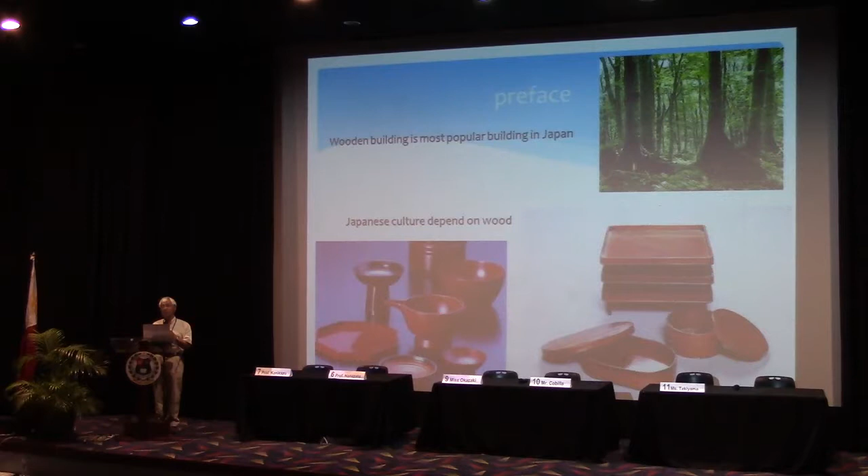Mainly four topics. At first, I introduce wooden buildings in Japan. Second, weak points of wooden buildings. Third, restoration work in Japan. And finally, cooperation between the Philippines and Japan. Of course, generally said, Japanese culture depends on wood as material. There are many buildings in wood, not only buildings, but also many handicrafts made of wood. And Japanese custom or ideas depend on a long time of life in wooden structures, wooden culture.

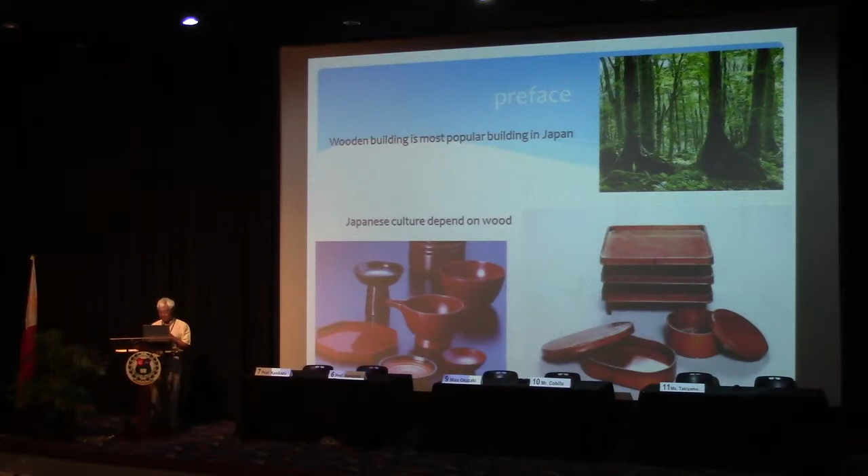I introduce some Japanese traditional buildings because before I introduce restoration work, I am afraid many persons did not see Japanese buildings. Some religious buildings. At first, I have to say, my presentation is not finished because I did not have enough time to prepare this presentation. And second, presentation time is too short. But I hope participants can understand the outline of restoration work of wooden buildings in Japan.

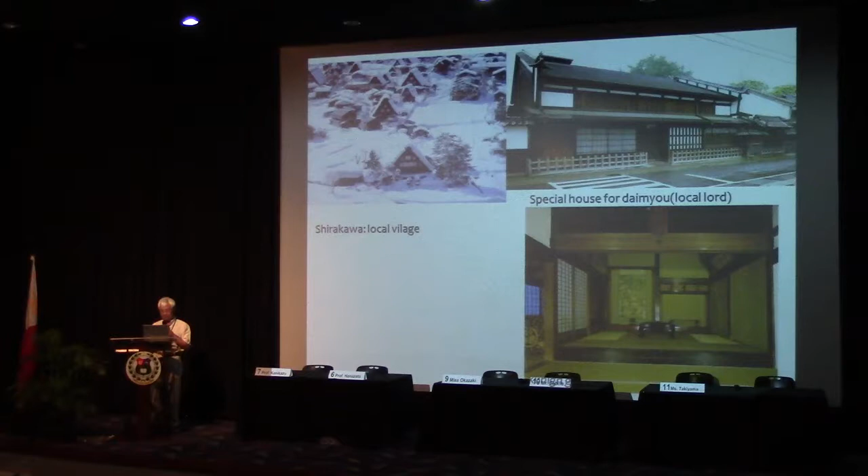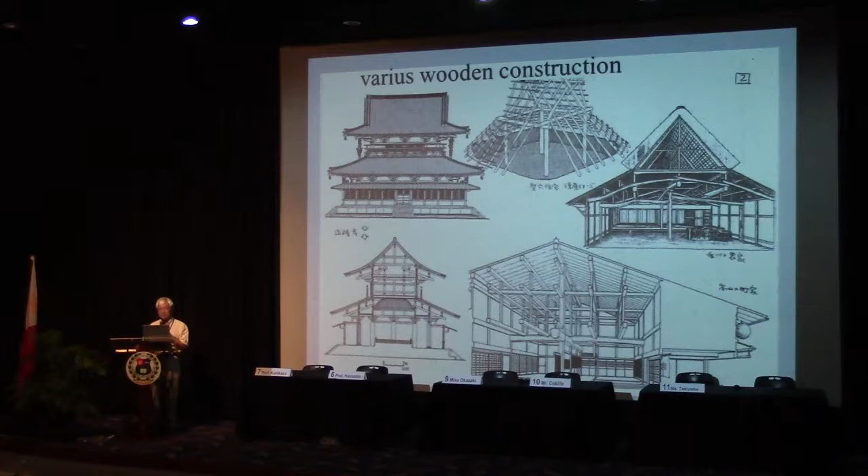This is also a Buddhist monastery, pagoda, some also religious buildings, shrine, Shinto shrine building, castle and tea house, some domestic buildings in Japan. When we talk about wooden buildings, it's not the same construction. We have various wooden constructions like this.

And wooden construction is very simple; it means various parts combined one by one. It is the basic wooden construction. So it means it is easy. Of course, a building is built from the bottom and then one by one the upper parts. It means we know the method of building. We take off the upper parts one by one. The picture is a combination of materials in wooden construction.

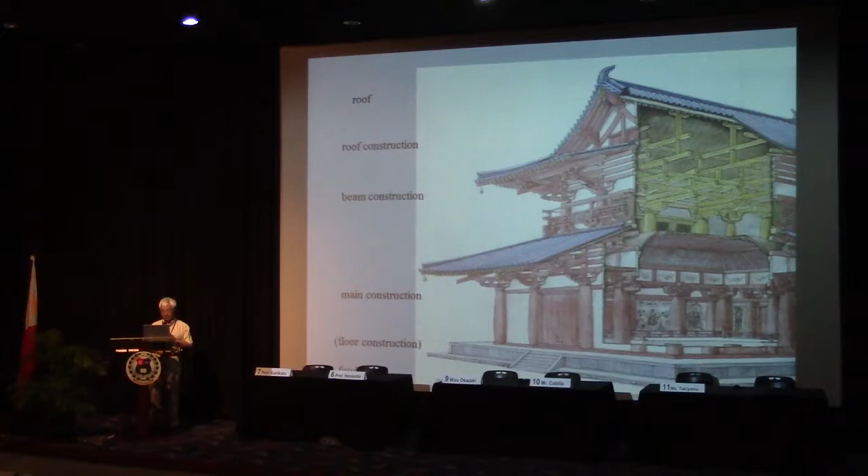And when we talk about Japanese cultural buildings, from the bottom we separate 6 parts: foundation and floor construction, main construction, beam construction, roof construction, and roof. But I say again, the wooden construction is combined by many parts like this.

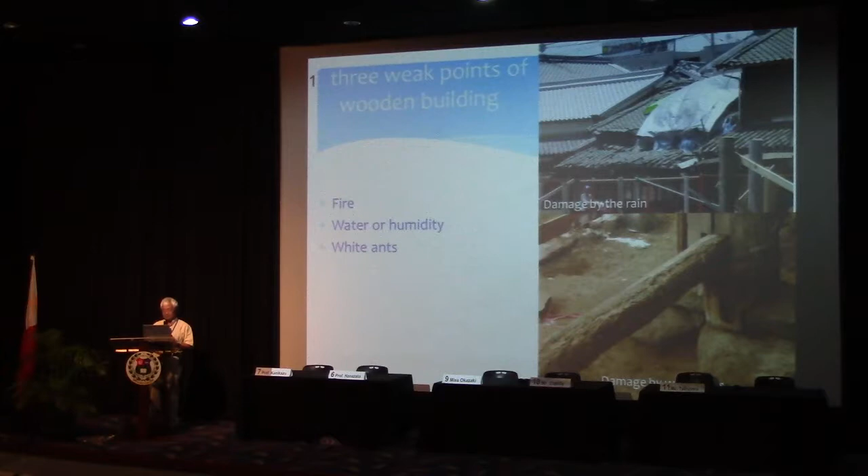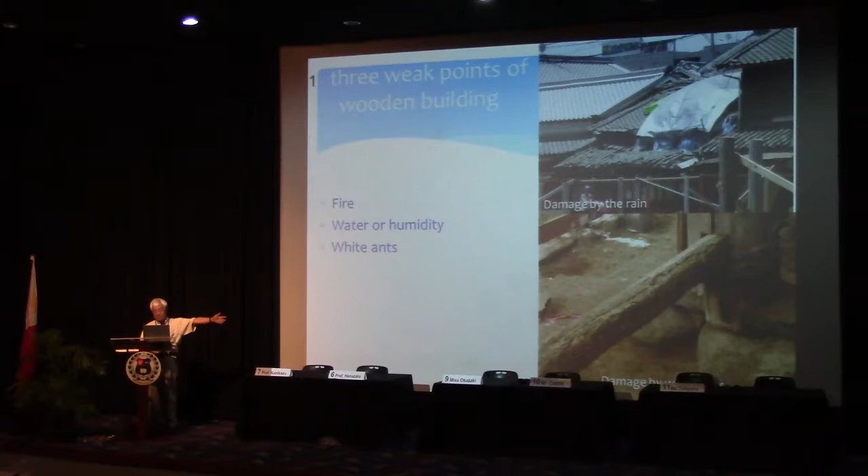Anyway, wooden construction has mainly 3 weak points, I think. First, fire, and water or humidity, and third is white ants and termites. The upper picture shows damage from rain, and the lower picture damage by white ants. And also fire, caused by many kinds of reasons. Sometimes battle or earthquake.

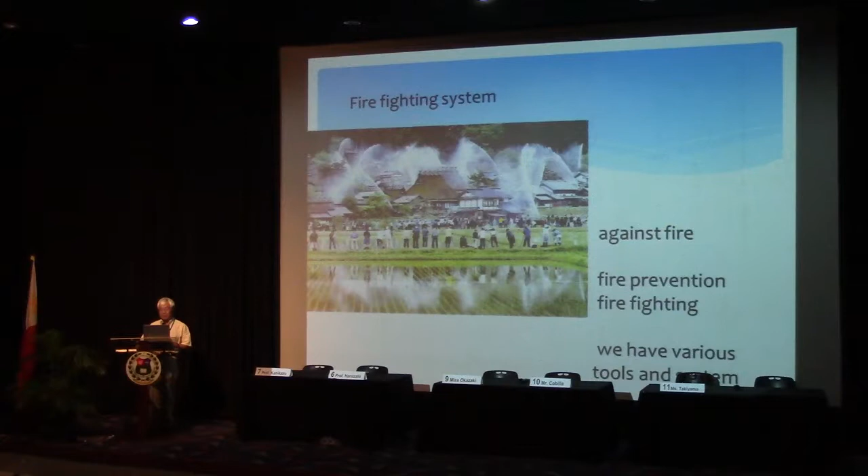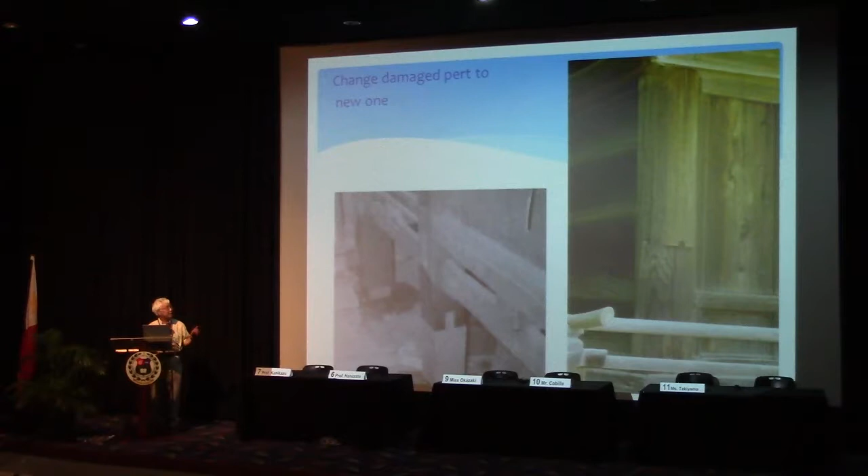And against fire, we have many methods: fire prevention or firefighting. And we need fire prevention and firefighting against fire to continue the building. And when we restore the wooden building, we have to change the damaged part to a new one. Like that, the lower part of the pillar is changed. Also, this is the bottom of a pillar that was changed.

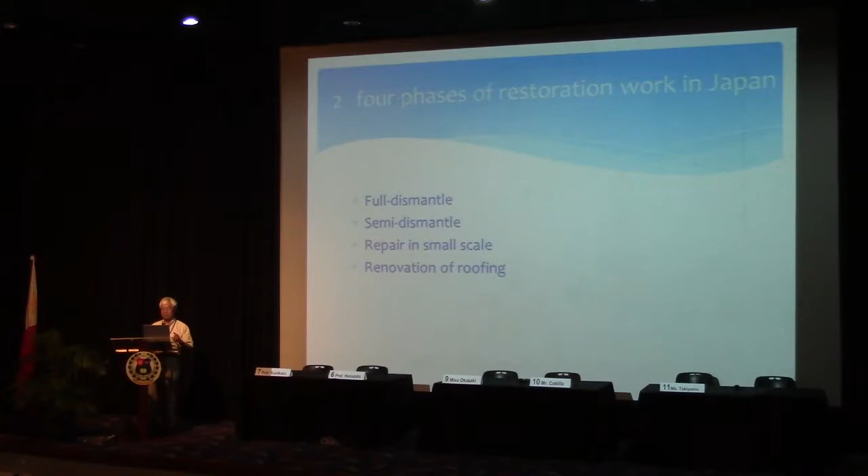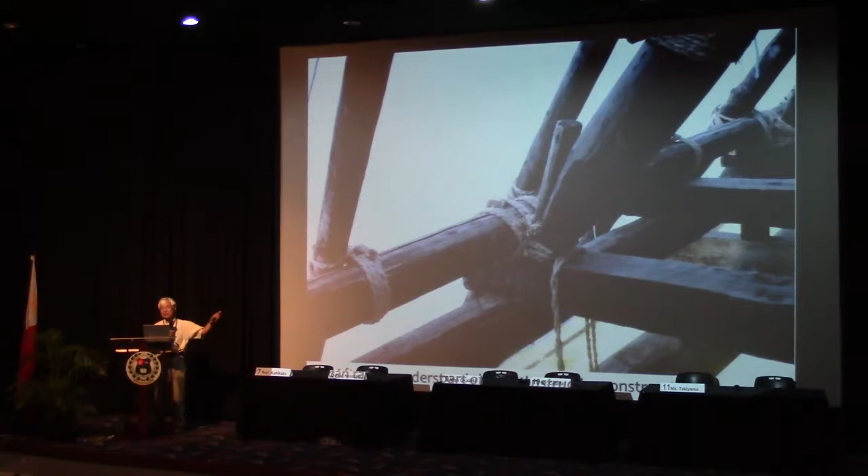And in Japan, restoration work has 4 phases or 4 categories: full dismantle, second is semi-dismantle, third is repair in small scale, fourth is renovation of roofing. Dismantle work means it is possible to take off parts one by one from top to bottom. If we know it correctly, it is no problem to take them off. You can understand if you know how to make this construction, it is easy. At first, to cut the rope, and second, some rafters, beams.

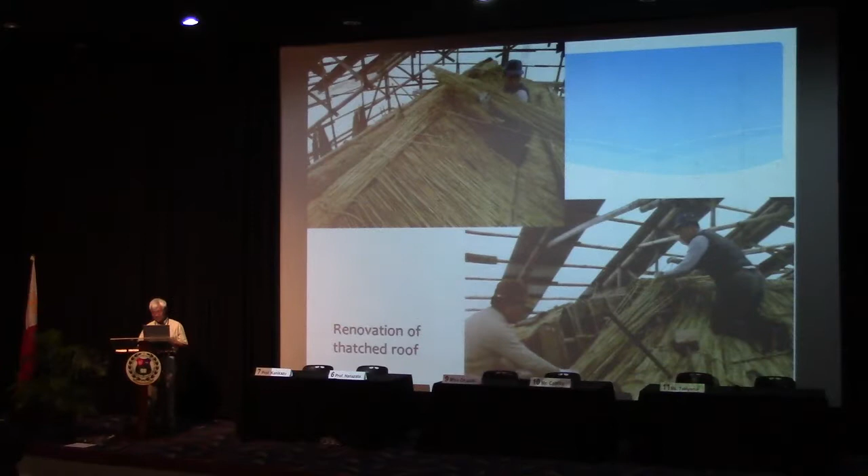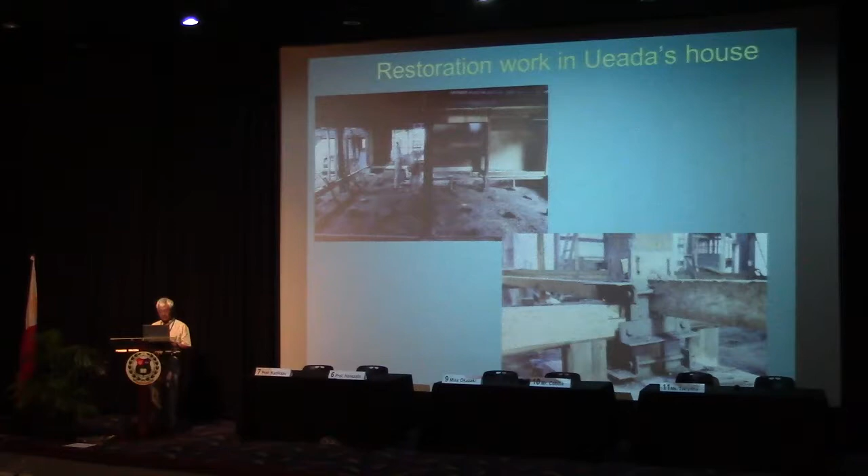This is also after restoration of a domestic house in the old town. And this is also the same house, restoration work. Sometimes we have to reinforce with new timbers, like these cross timbers.

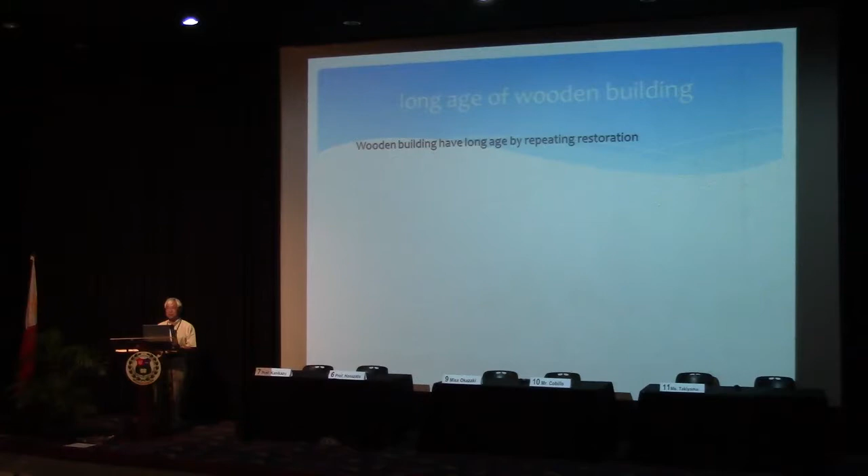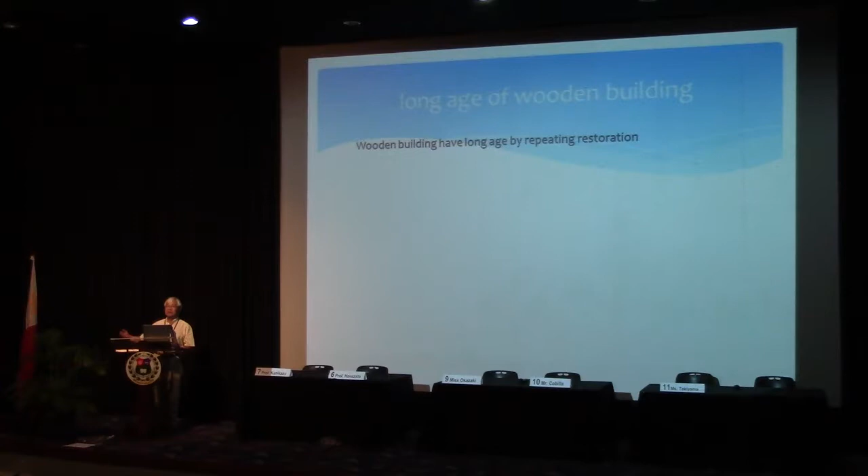In Japan, we have many old traditional buildings. For example, Horyuji was built at the first end of the 7th century, and many religious buildings of 300, 400 years are popular. It means long-living buildings by repeating restoration. It is very important. Repeating restoration and good maintenance keep the long life of a good building.

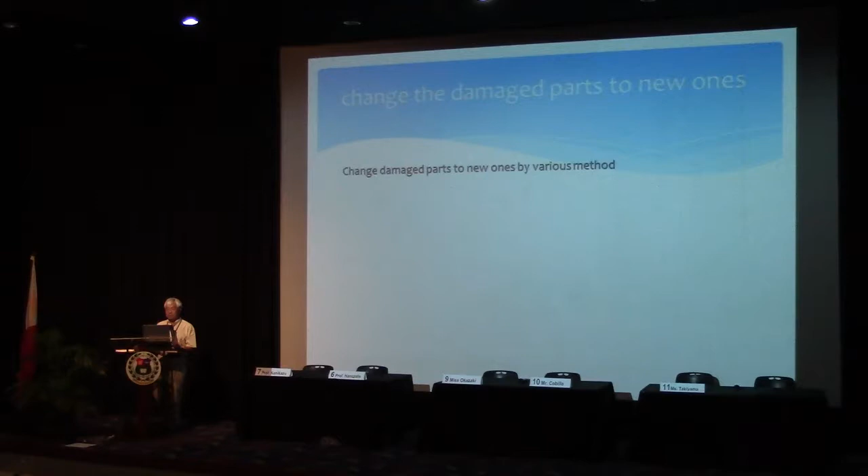And when we have to change some part, especially a damaged part, to a new one in a good building, I show some restoration work. The left picture is damaged. A strong typhoon came here and a big tree fell down on the pagoda. And then we restored this pagoda and it went back to its original figure.

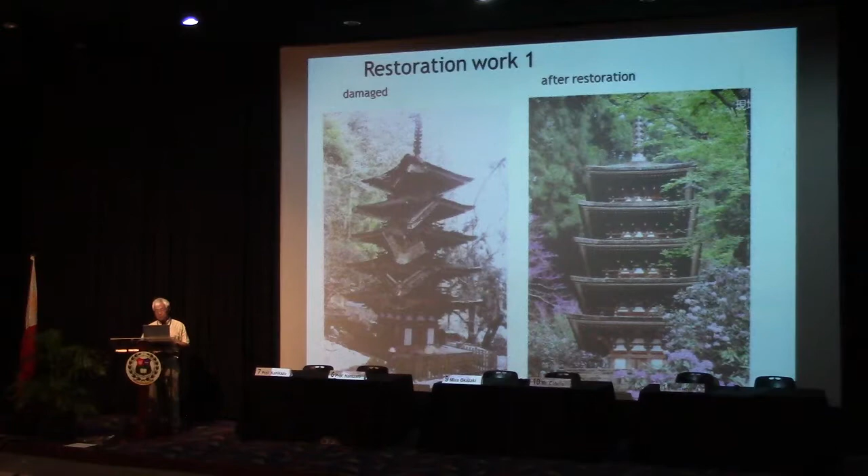Also, the left side is before restoration and the right side is after restoration. So it means if there is very big damage in a good building, if you restore it, it will come back to good condition like this. This is also a restoration work sample. The roof was weathering, but after restoration, the state got into good condition.

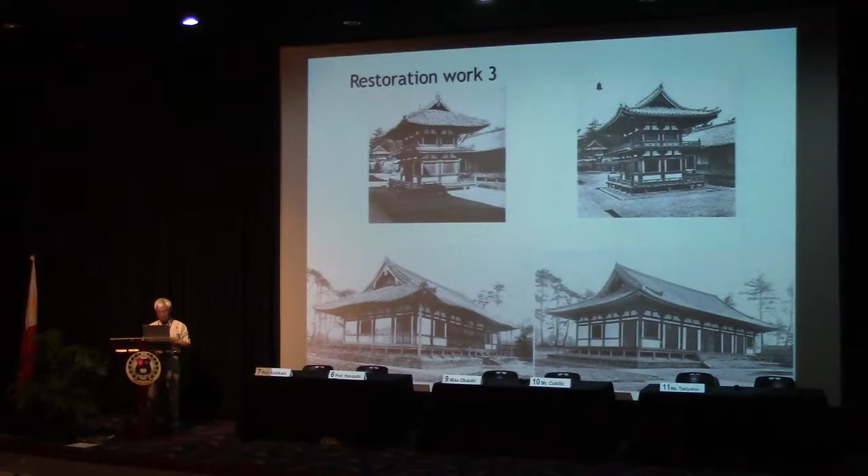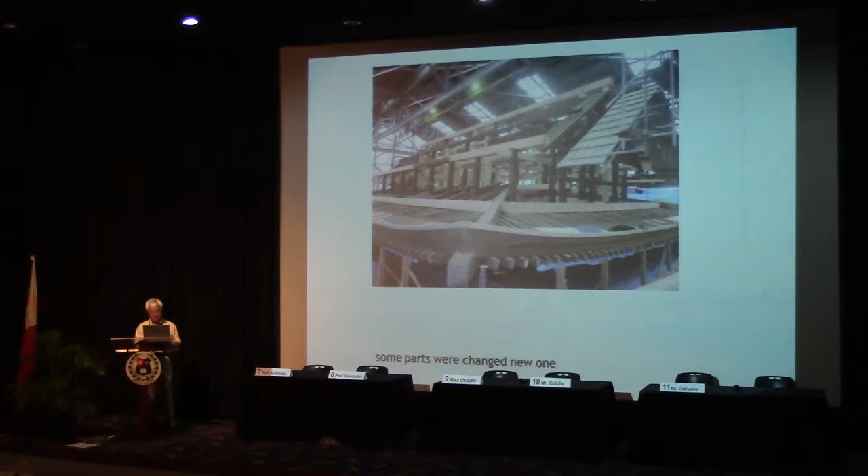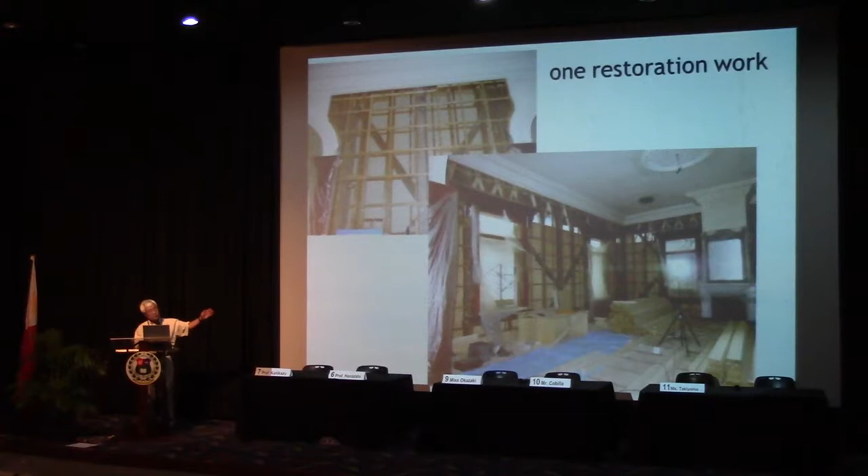You can understand the new timbers in the roof construction. The slightly white band is new, but the black band is kept original. Also the same, sometimes we have to change or attach new materials. This is an example of a connection. We know how to connect. It means it is easy to know how to take it off.

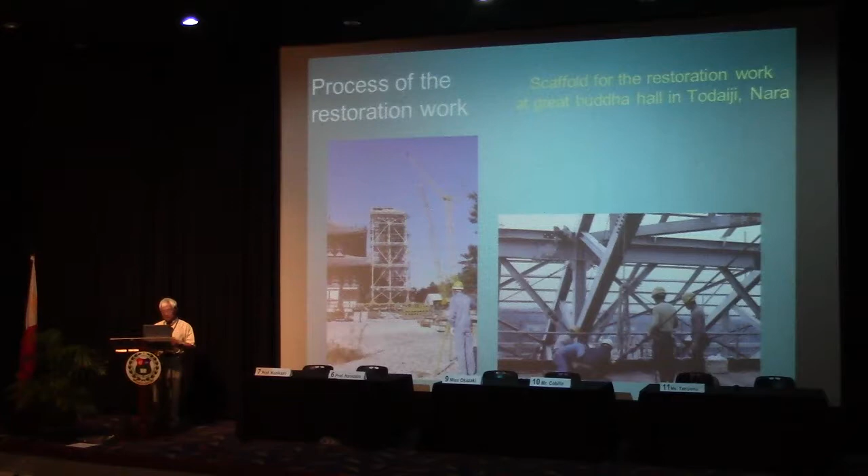Another, this is the traditional coloring, like this, but this is also restoration work. And another problem: we have to build scaffolding around the building. This is a big hall in Nara and a big scaffold. And in the scaffold, we carry out the restoration work in safety, against fire, against rain.

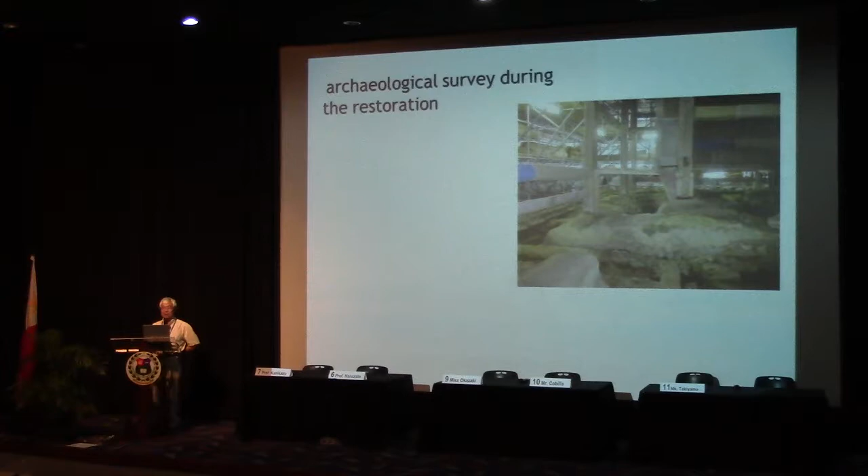Now, like this iron construction, and sometimes we have to carry out an archaeological survey during the restoration work. And coloring. And we have many problems: management and finance and material and method.

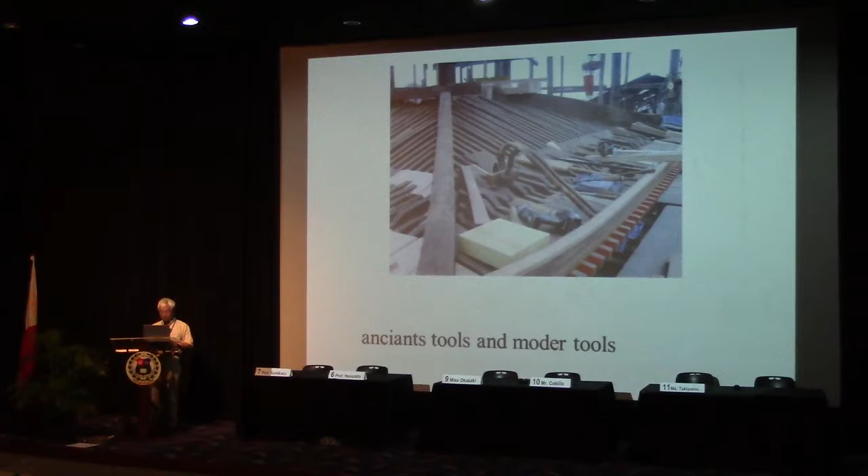And I introduce a special association in Japan, Bunkenkyo, JACAM, the Japanese Association for Conservation of Architectural Monuments. This association carries out almost all of the restoration work in Japan. If someone is interested, please open the homepage of this association.

I hope, of course, my presentation or Japanese experience is perhaps not directly useful for restoration work in the Philippines, but I think the experience and methods and ideas in Japan are perhaps useful for thinking about restoration work of wooden buildings in the Philippines. Thank you for your attention.

Thank you so much, Professor Ueda. Our next speaker will talk about the structural rehabilitation of damaged historical stone churches, the review of the monitoring mission to the Paoay World Heritage Church, and an introduction of ICOMOS recommendations. From Mie University, ICOMOS Japan, help me welcome Professor Toshikazu Hanazato. A round of applause, please.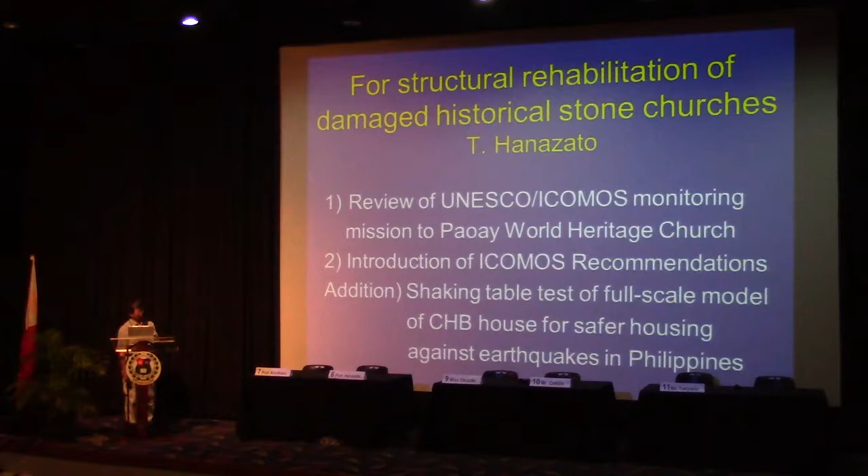Thank you, Chairman, for your introduction of my presentation. First of all, I would like to thank Professor Jimenez Sensei and Professor Miyake Sensei and the organizing committee members for giving me the opportunity to present here. I prepared two topics, and in addition, I will also present another topic on safer housing in the Philippines.

The first topic: the ICOMOS monitoring mission to Paoay Church in 2000. I was sent to Paoay Church to conduct this monitoring mission. And to follow the first mission, I conducted the reactive monitoring mission in 2002 and 2004, along with a seismic structure survey of this church.

We have four Baroque churches on the World Heritage list: Paoay Church, Santa Maria Church, San Agustin Church in Manila, and Miagao Church in Panay Island. This is Paoay Church, constructed in the beginning of the 18th century. This is Santa Maria Church, constructed in the beginning of the 19th century, World Heritage, and I conducted the structural survey in 2002.

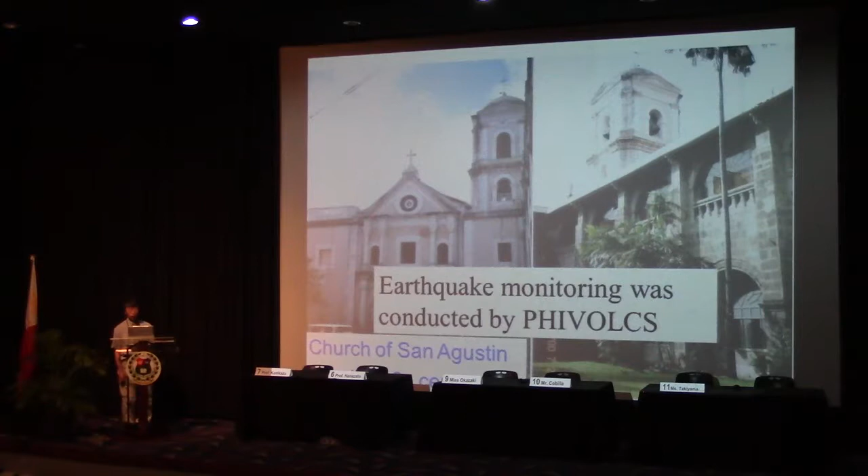This shows the Church of San Agustin in Manila, constructed in the 16th century, and earthquake monitoring was conducted by PHIVOLCS at the time. And this is Miagao Church, the World Heritage church in Panay Island. This picture is the perspective of Paoay Church. As you can see here, this church is called earthquake baroque, characterized by a wall structure with thick walls and buttresses.

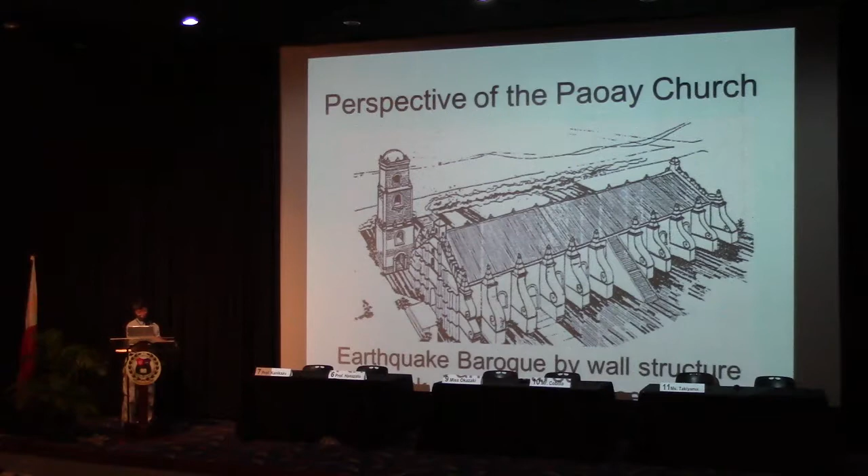And this mission was conducted in cooperation with NCCA, National Museum, and NHI, and PHIVOLCS, and Public Works and Highways, and Japanese-Philippine, and Philippine ICOMOS in 2000.

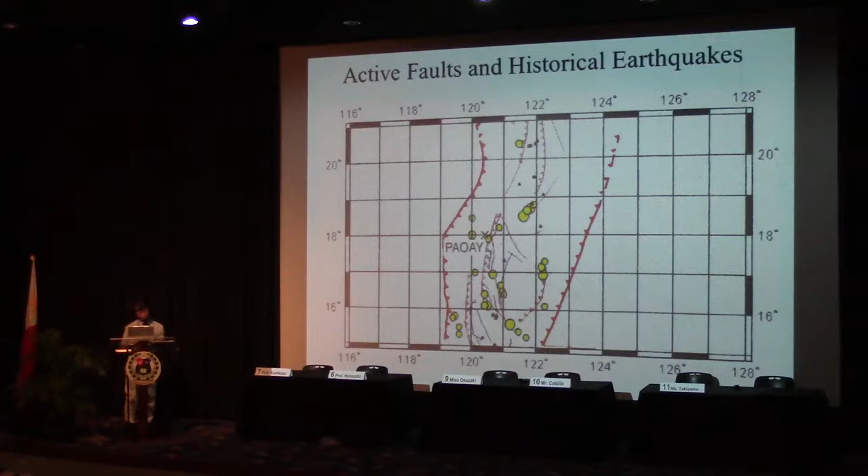This is the map of active faults and historical earthquakes around Paoay. And as you can see here, Paoay is located in a very seismic area. You can see here. So this church was affected by the historical earthquakes. In the long history of this church,

And this shows the typical wall section of our church. Inner layer brick, local concrete, and exterior coral stone, covered with coral stone. The same structure as the stone churches in Bohol Island and Cebu Island, affected by the Bohol earthquake.

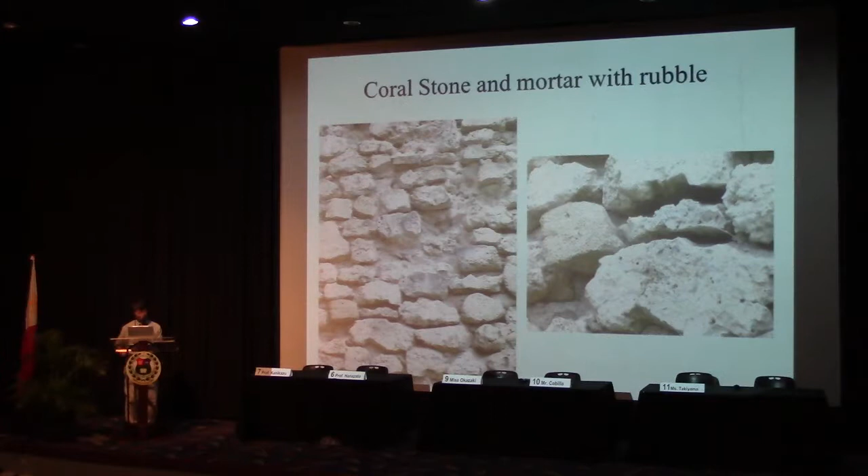So this shows the coral stone and mortar with rubble of our church. Irregular coral stones were used in this church. And this is the facade wall, main facade wall. You can see here the tilting of the facade wall.

So UNESCO Philippines was worried about the seismic safety of this tilting of the facade wall. So the main purpose of the monitoring mission was to survey this tilting of the facade wall.

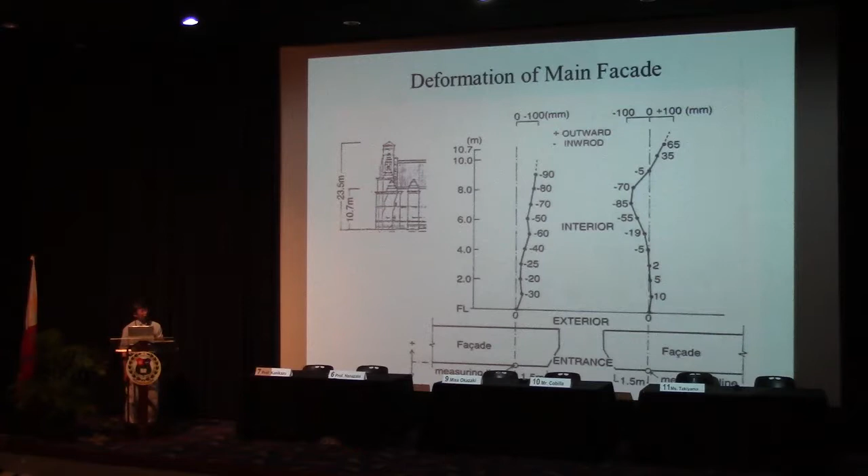And I proposed a very simplified low-cost monitoring technique of cracks using glass plates. So they install the glass plate on the gaps to check the movement of the cracks. If the glass plates are broken, the cracks moved. So this side is not stable.

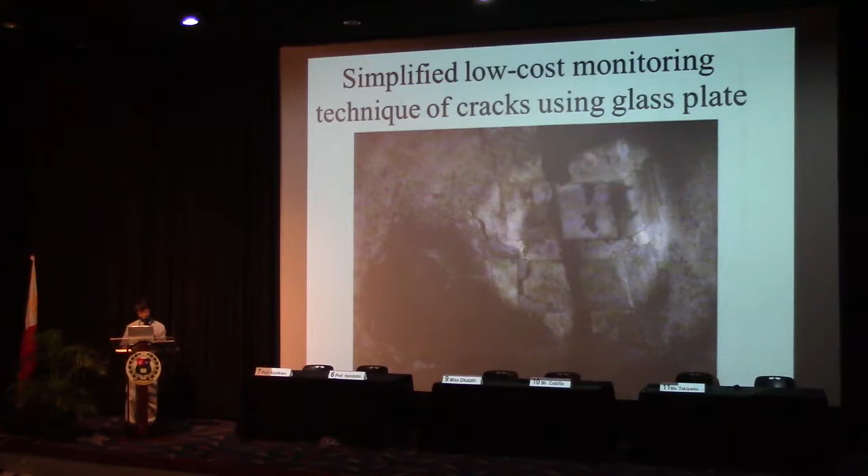Anyway, at the time we considered the possible causes of tilting of the main facade: irregular settlement of foundation, strong motion during past earthquakes, long-term deformation of structural material that has deteriorated, and fourth, the deformation of local traditional concrete during and or just after the construction.

And as a result of the survey, at the time we concluded the fourth reason, deformation of local traditional concrete just after the construction, would cause such deformation. At the time, we conducted dynamic microtremor measurement to know the fundamental characteristics of the structure, for example, natural period, the natural mode of the structure.

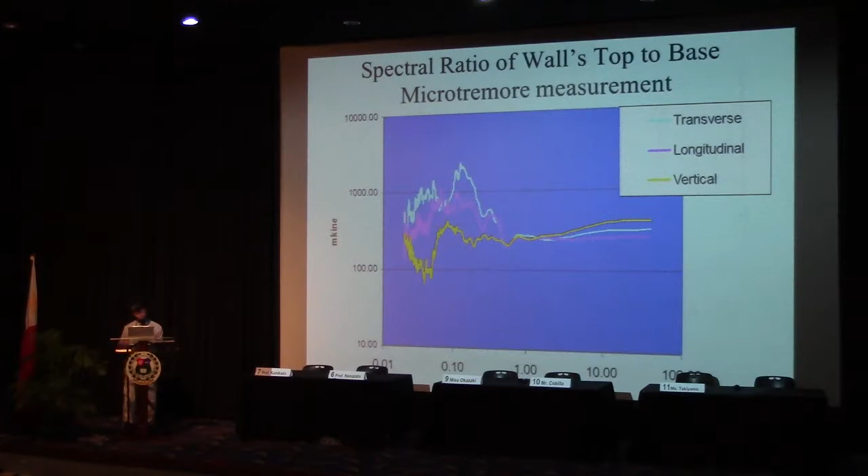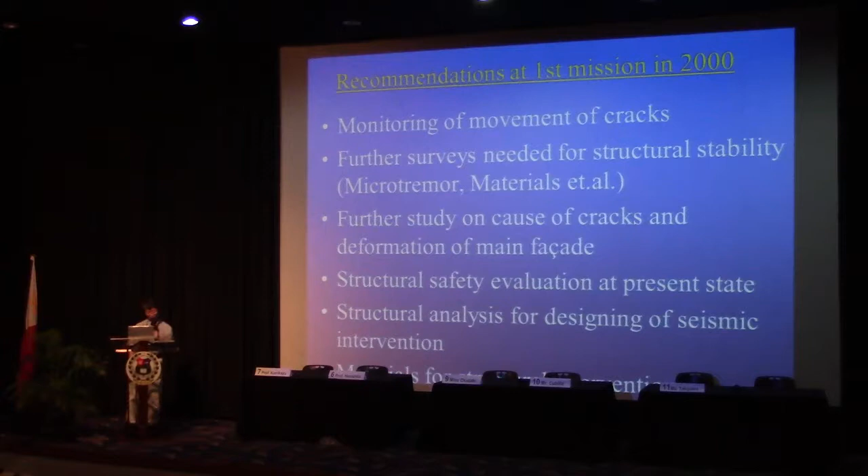So this is a spectral ratio of wall top to base by microtremor measurement. And a natural period of 0.1 was observed at the time. Very short natural period. And we made recommendations at the first mission in 2000. So 7 items were recommended after the first mission in 2000.

And this is also the recommendation at the second mission in 2002 for Paoay Church. So monitoring of movement of cracks, not a simplified method, but a scientific method should be installed in this wall. And I proposed it.

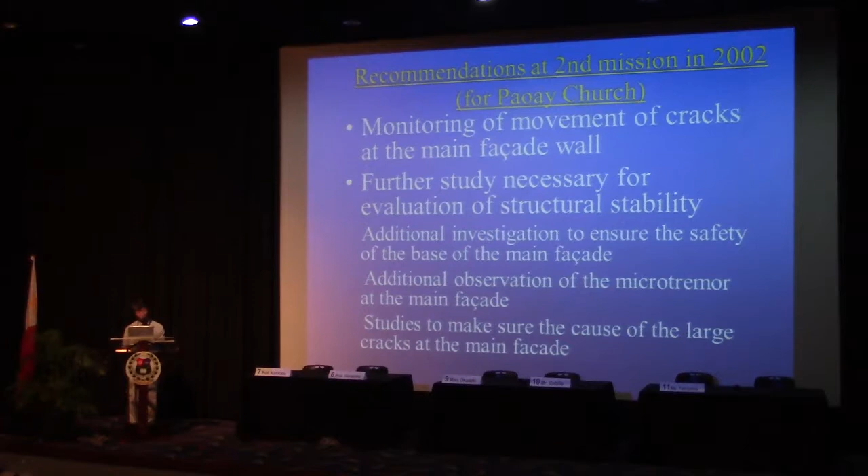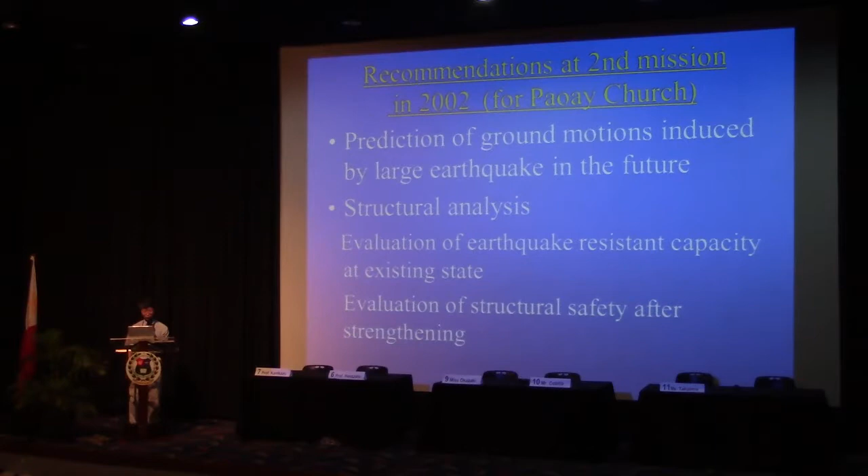And further study is necessary for evaluation of structural stability and prediction of ground motion induced by large earthquakes in the future. And structural analysis is needed for the discussion and proposing structural restoration of Paoay Church at the time.

And we helped them to conduct the survey of the church and conducted mechanical tests using samples. So this table shows the mechanical properties of mortar, coral stone, and bricks. As you can see here, density. Please focus on the density in the upper second line.

The density of mortar and coral stone is 1.5. Light materials were used, not so heavy. So very porous material was used.

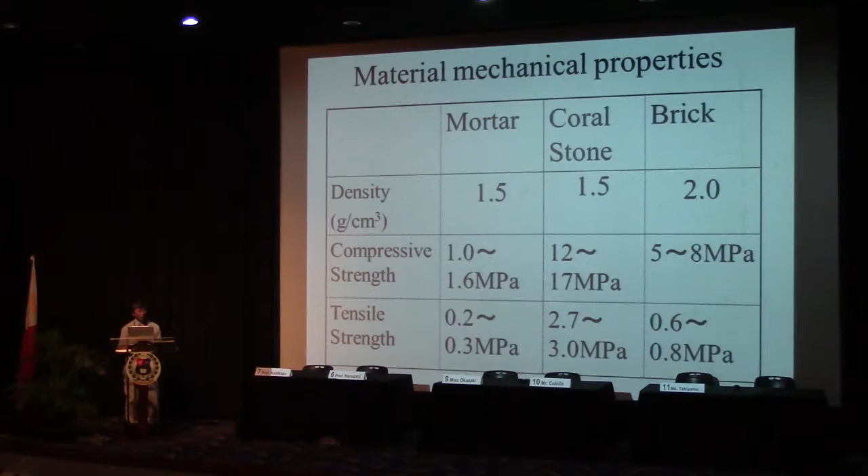And a local meeting was held at the Paoay municipality, and the mayor with the local committee and the NCCA expert attended this local meeting, and we discussed how to restore Paoay Church, because they have a master plan to develop sightseeing for tourists. So they discussed with us how to restore our church at the time.

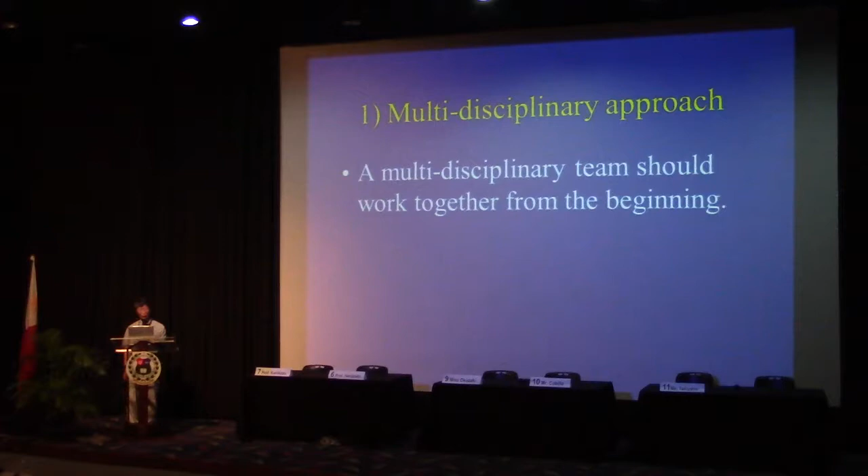And I would like to move to the next topic. So, recommendations for the analysis, conservation, and structural restoration of architectural heritage, as a member of ICOMOS and ISCARSAH. Today, I pick up 10 articles. The first one is the multidisciplinary approach: a multidisciplinary team should work together from the beginning.

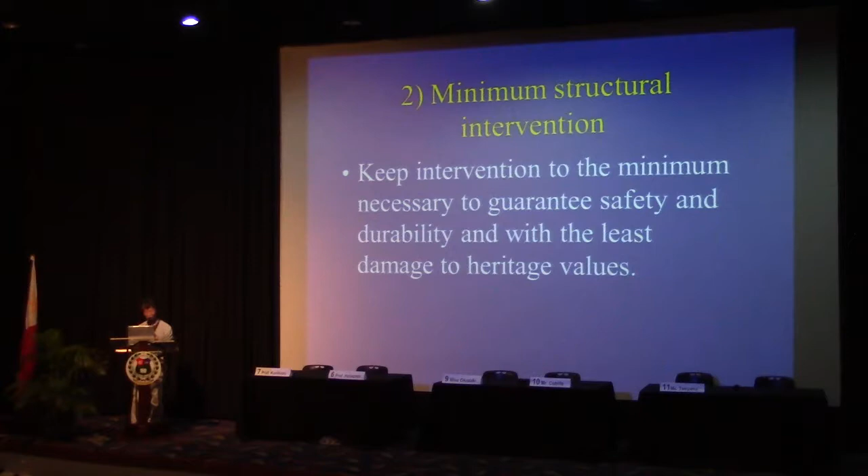And the second one is the minimum structural intervention, the most important concept of the structural restoration of heritage structures: to keep intervention to the minimum necessary to guarantee safety and durability and with the least damage to heritage values. The third, diagnosis should be based on historical information, qualitative and quantitative approaches.

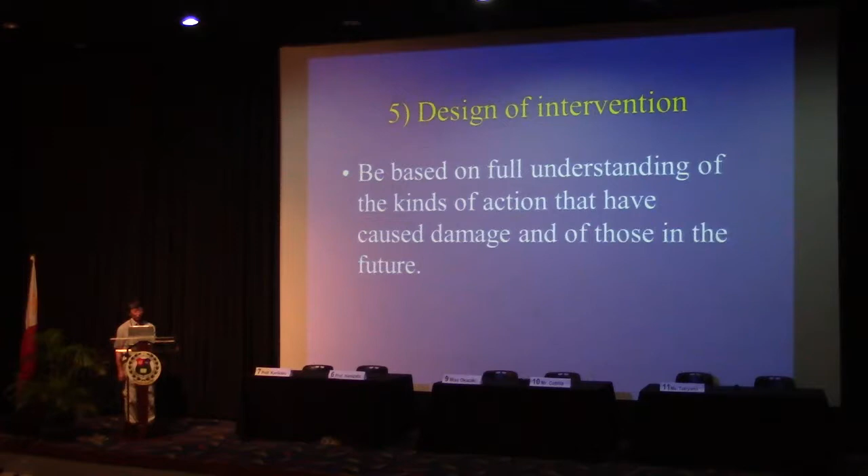And the choice between traditional and innovative technologies and techniques should be determined on a case-by-case basis, with preference given to those that are least invasive and most compatible with heritage values, consistent with the need for safety and durability. And fifth article, the design of intervention should be based on full understanding of the kinds of actions that have caused damage and those expected in the future.

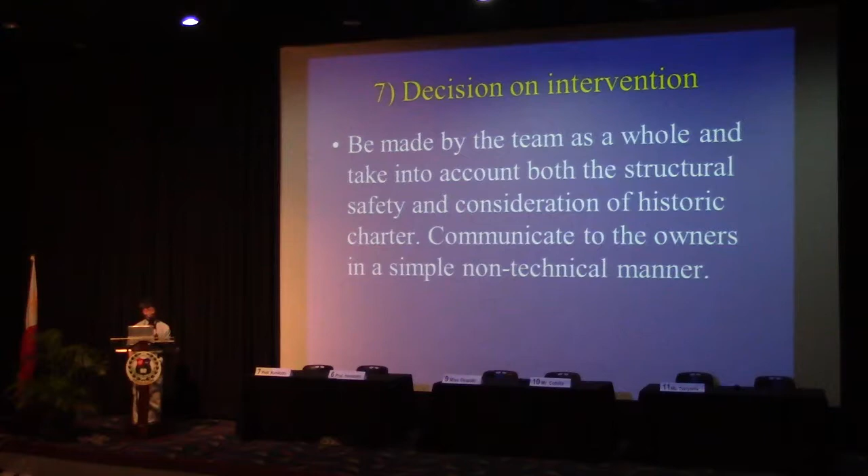And the sixth is the concept of intervention. We should respect as far as possible the original concept and construction techniques and historical value of the structure and historical evidence. And seventh, the decision on intervention should be made by the team as a whole, taking into account both structural safety and consideration of historic charter. Communicate to the owners in a simple, non-technical manner.

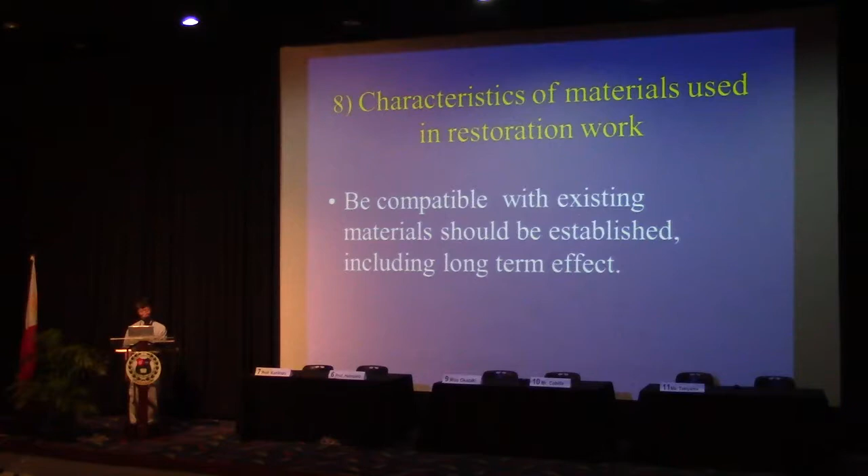And eighth, the characteristics of the materials used in restoration work should be compatible with existing materials and should be established, including long-term effects. And the monitoring: any proposal for intervention must be accompanied by a program of monitoring and control to be carried out. And the last one is the explanatory report, a detailed specialist report providing the acquired information, the diagnosis, including the safety evaluation, and any decision to intervene.

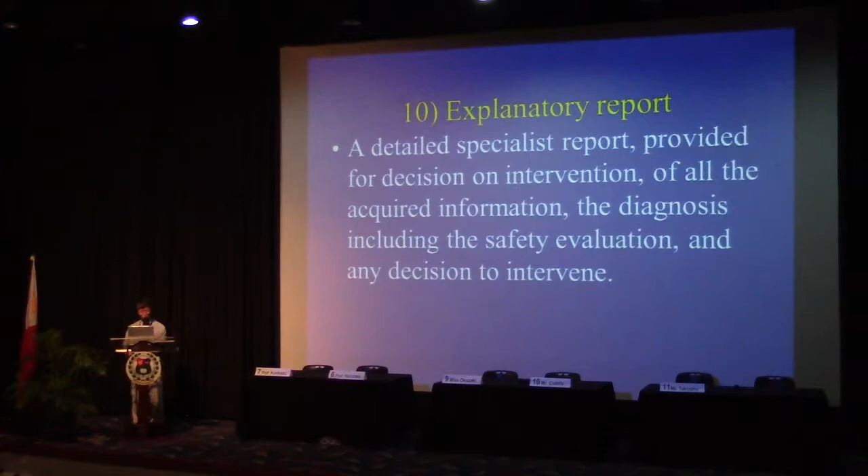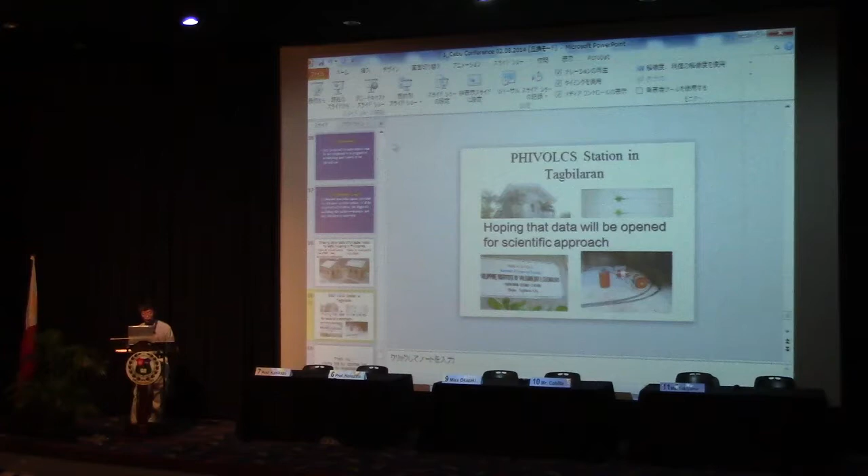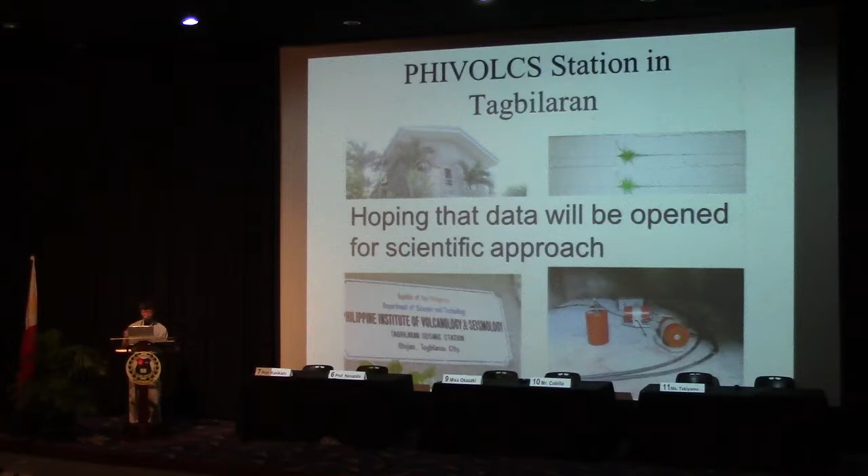Last two slides. In addition, the station in Tagbilaran also recorded the earthquake motion, but I hope that the data will be opened for scientific approaches. They have not opened the earthquake data yet, so I hope. This strong motion data is very helpful for the seismic scientific approach and from the earthquake engineering point of view. Thank you. So I hope that our activities will help the rehabilitation of damaged cultural heritage.

Good afternoon. My name is Rumi Okazaki. On the program, my title is researcher at CNRS, the French National Center of Scientific Research, but I am also teaching in several universities in Japan, especially Fuji Women's University, Professor Miyake's university, and also Kyoto University of Art and Design, Shigeru Ban's studio. And so today I'd like to talk on behalf of my team. We are working with the group headed by Professor Miyake and Shigeru Ban on disaster rehabilitation projects of temporary housing in Bantayan in Cebu, and we are about to start the temporary church project in Bohol.

So today, because it's a cultural heritage symposium, I'd like to focus more on the Maribojoc Church. For those of you who might not know so much about Shigeru Ban, he is a Japanese architect who has been working a lot on disaster rehabilitation projects, such as this church in Kobe in Japan. This was meant to be a temporary church in Kobe, but people used it so much that it was moved to Taiwan, and the Taiwanese people still use it.

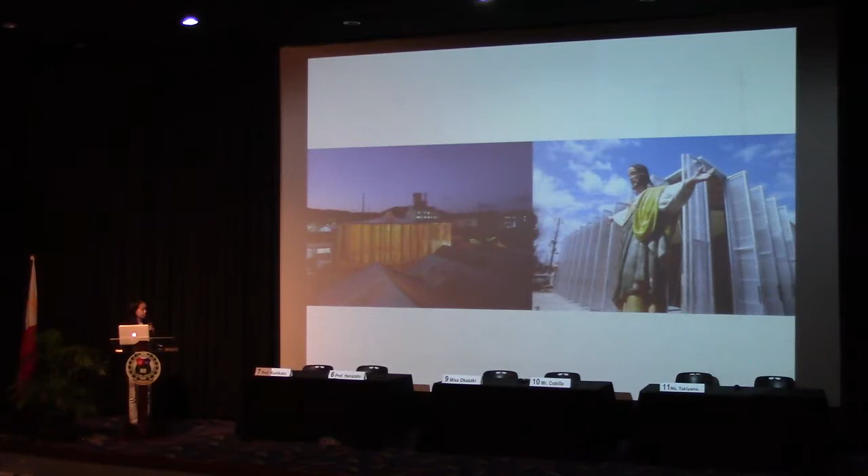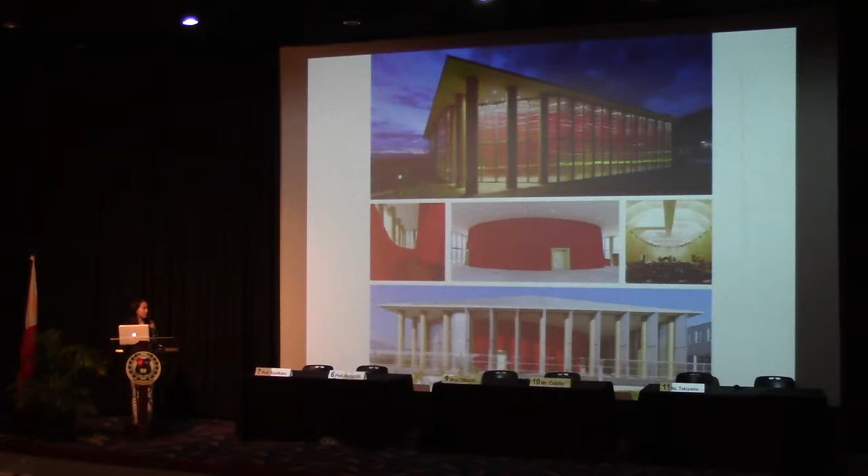Also, this is not a church, it's a music theater in L'Aquila, Italy. So he has been working on several public buildings such as these buildings and also temporary shelters.

So after we heard about the Bohol earthquake and also the typhoon, we were very shocked, and we wanted to do something. And Shigeru Ban, as always, immediately came to Cebu and Bohol with Professor Miyake, who has been working in the Philippines for 2 years now with the University of San Carlos.

Also in Japan, we had a lot of news about Tacloban, Leyte. Because of the high tide, a lot of houses were damaged, and we really thought it is like the image that we saw in the Great East Japan earthquake. The tsunami image is very similar to this.

But despite these images, there are many other places that were affected by the typhoon and also the earthquake, especially in the northern part of Cebu in Bantayan, where we are building. There were many houses destroyed. The statistic says that 19,850 out of 21,000 houses were totally damaged. So you can see how bad it is.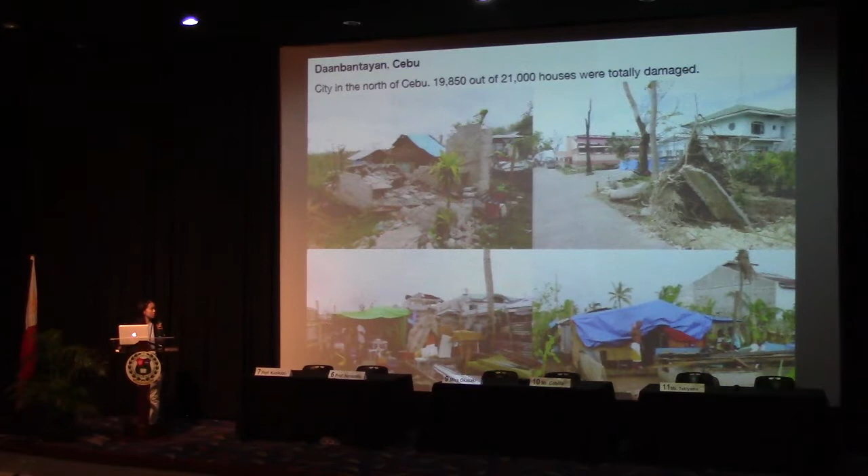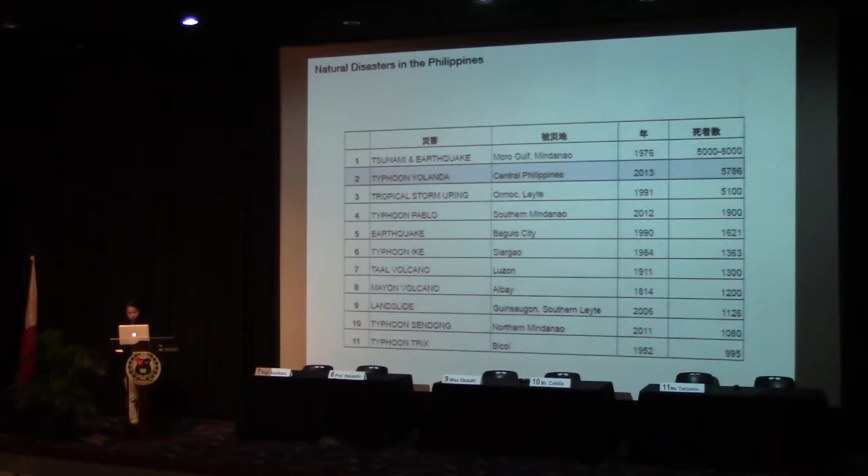And also, if you compare the historical disasters in the Philippines, Typhoon Yolanda, we call it number 30, Typhoon Sanjugo in Japanese, was one of the worst natural disasters in Filipino history. So this really meant a lot for us to come and to build the houses.

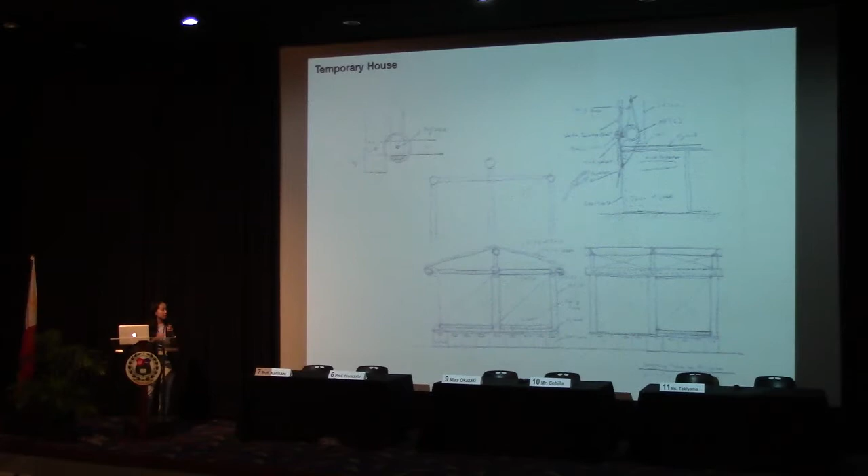This is the initial sketch that Shigeru made after his visit to Cebu and Bohol in November. So this is what we made with the student volunteers, Japanese students and also from the University of San Carlos. Now in Bantayan there are 3 houses like this, and this August we are also planning to build 3 more houses.

We hope that we were able to help a little bit, and also this kind of program is very efficient for education because the students are also learning and participating in this kind of work. Of course, Shigeru's signature material, the paper tube, is inside, but the walls are made with amakan and coco lumber, together with roofing of nipa material.

So I just wanted to give you this example before I explain about the church, because I think we learned a lot about working in the Philippines by making this shelter. For example, we ordered the paper tubes. Paper tube is a nice material to use because you can find it almost anywhere in the world. This time we ordered the paper tubes from Manila, so they were shipped. They were supposed to be 2 meters, but when they arrived they were in different dimensions. So this was one unexpected thing that happened first.

Also, we had some problems waterproofing the tubes because of the liquid that we used. We couldn't find a very nice liquid to paint on, and there were many air bubbles, it was too shiny, and the paper tube became too brown. So when we make the church, we want to improve these kinds of things. For the shelter, it was not such a big problem, but still, you can see that the colors are not so even. If we can improve this, we could make a better design for the church.

Also, we noticed that when we were drying the paper tubes, the sun was too strong, so the paper tubes became bent a little bit. They curved. So we had to press them with the tables to make them straight again. So these were the kind of really unexpected things that happened while working here.

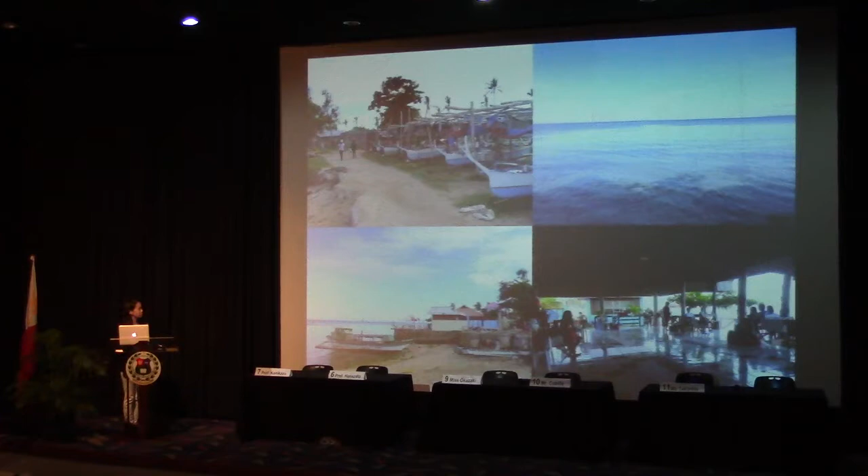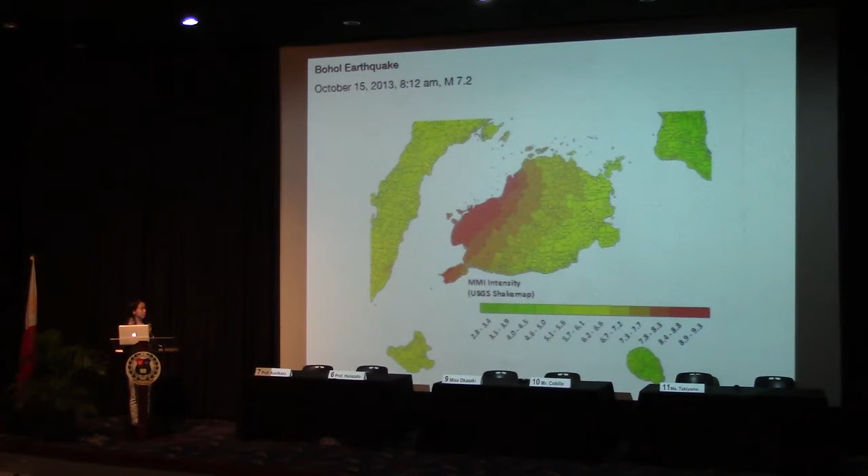So moving to the Bohol earthquake, as many people have already mentioned, Bohol island was struck by the earthquake, and the western coast was very much damaged. So we went to see several churches right after the earthquake in November with Professor Miyake and Shigeru Ban, and we had several meetings on where we could build churches.

Some of the houses were also destroyed, so we were thinking about building temporary shelters here as well, but finally it didn't happen in Bohol.

This is when Shigeru was here in November. We visited Bohol, and here in the Kappa Theater there was a big class or session introducing his works, and some meetings with the local representatives and also the university deans and staff members. This was a very efficient meeting, and afterward we tried to come up with a nice design.

We are still in the process of designing. It's taking quite a long time because there were some things we had to calculate, for example the strengths of the paper tubes. They were very different from the Japanese paper tubes, so we had to do a compression test and so on. It has been taking a little bit of time, but we are still enthusiastic to keep moving the project.

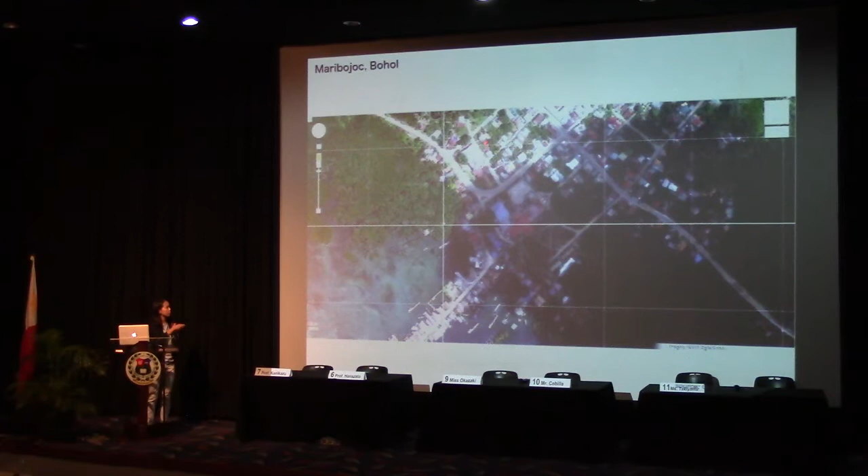So this is the final site that we were proposed. We had intense discussion, especially with Father Ted and the local architect, and they proposed to make the new church here. This is the Google Map image before the earthquake, so you can still see the Latin Cross building here. But actually in Maribojoc, the church was destroyed. So here there is the destroyed church, but here you have a very big space. So this is the proposed site for us.

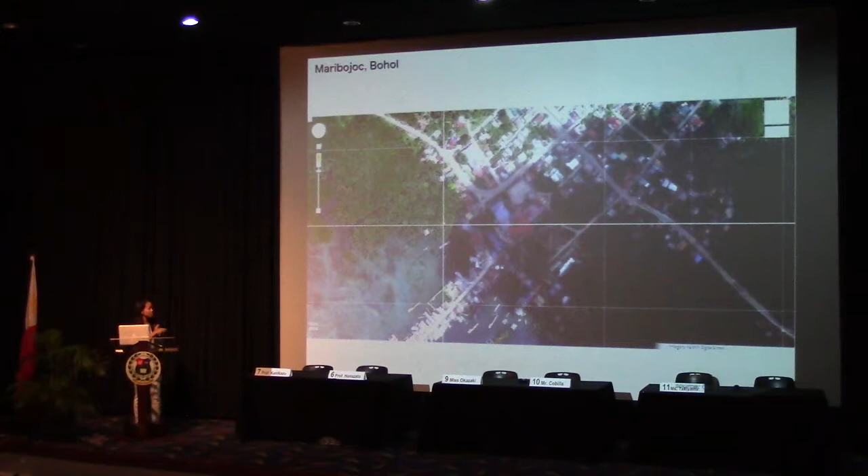And this is the site plan. So here you can see the Latin cross, and this is the proposed site. It's quite spacious, larger than the actual original church. But we have to consider that some part of this site has to be kept for the materials that will be preserved to actually reconstruct this church.

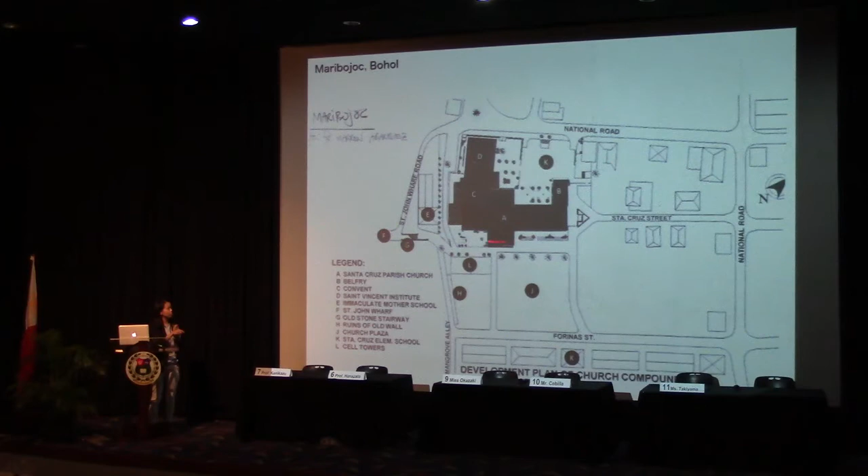This is the site, so we have a very nice open space. And this is the church proposal that Shigeru made. Initially it's a circular plan with, of course, the paper tubes. Initially we were thinking of making bamboo trusses and wooden louvers to cover the paper tube structures, but we have had some modifications later on.

From the sketch, the students made this kind of funky-looking model. It has Nipa roofing, it has a bad hair day. And the trusses—I think there's too many of them—but the students tried to imitate his sketch as much as they can, so you can actually get the image of what they tried to do.

But the problem with this church was that the diameter was not big enough. This is about 10 meters in diameter, which is not so big for a church, and there isn't enough seating inside. Also, the functional components of the church could not be set inside, so we had to make the area larger.

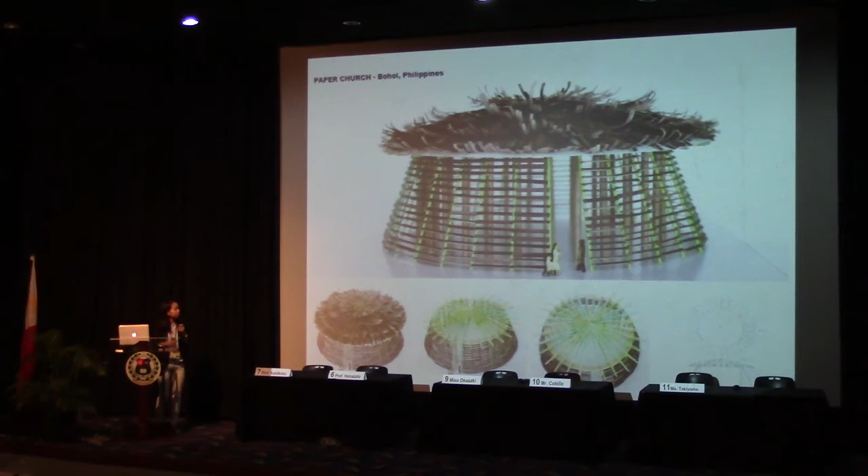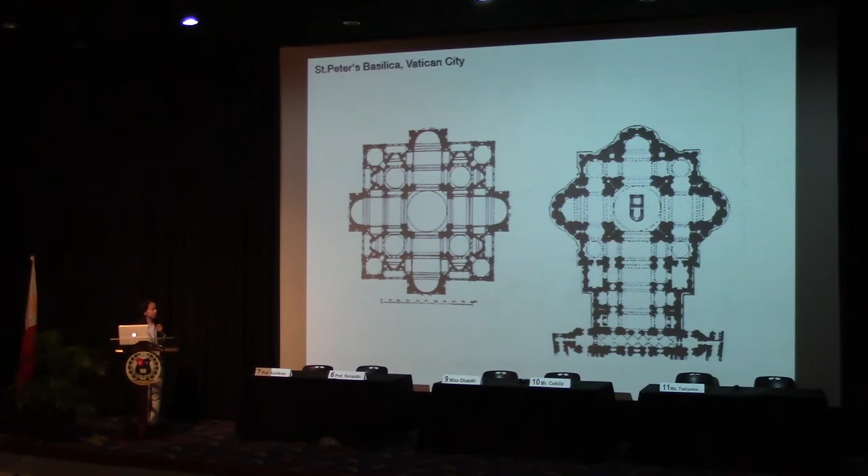However, the problem was that making the diameter bigger was not so ideal, because you cannot make the span so big with these bamboo trusses. We also had some discussion about a centrally planned church versus this kind of Latin cross church, or a church with an axis. So we are still discussing a lot about these kinds of plans.

This is the thing I was talking about—these are the original materials of the old church that we have to keep on the site. So some space would have to be preserved on the site.

We also discussed this plan with Professor Melba, and she told us maybe the altar would be nice if we made it in the middle. So we tried to make another model with this. But then the problem was the roofing, because with one circle it's not so difficult to make, but with 2 circles, the roofing is so difficult to make.

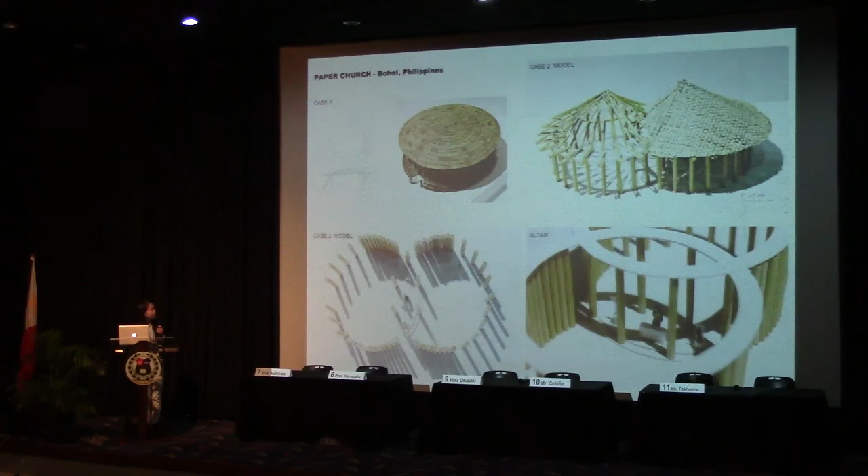This is one example or image that we considered, because in Vatican City, in St. Peter's, you have 4 posts at the altar, and this kind of corresponds to this plan where you have 4 posts here. So we thought maybe this could be an idea, but we are still brainstorming about it.